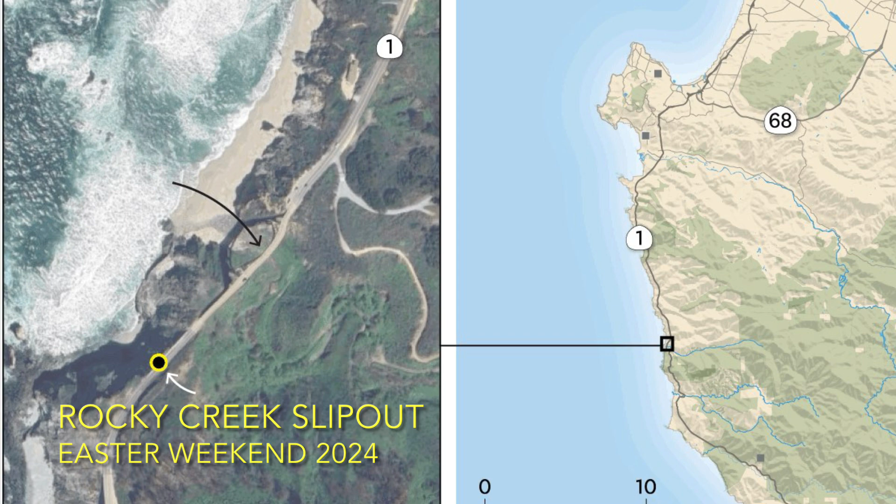Tourism and businesses - that oftentimes ends up being one of the biggest challenges. You've got a situation that can be looked at as one-way in, one-way out, depending on if there are multiple locations where we have failures we have to fix. So oftentimes it ends up being as much of a challenge as actually fixing the road or getting it back to the way it was before - more of a challenge dealing with the entities we have to deal with, in addition to actually getting the road back.

Lot going on Highway 1 normally, and even more so when we have a section of road that's caved in - whether it's more of global instability rather than local instability. There's many things that impact it.

My involvement on Highway 1 to this point in my time with CalTrans is the Rocky Creek slipout that just occurred earlier this year - the turn of late spring, although March and April often bring some of the most rain to the Central Coast, as I'm sure you're all aware.

So what I've got today is a couple things. One is I gave a presentation on this project, which is currently in active construction right now, to our branch managers meeting about 2 or 3 months ago. There's been a lot of activity and progress made in the past 2 or 3 months on this project, and what I've got in front of you is essentially a copy of that presentation.

So we'll go ahead and get right into it. Let's talk about the incident. You kind of have a visual there, second page of your handout, but you can see basically what happened was - it was the very tail end of March into April, Easter weekend or on the tail end of Easter weekend, somewhere in that time frame. We've got specifics on the next page, but we essentially lost a portion of the southbound lane, as well as a portion of an existing rock wall that we call it on that southbound lane.

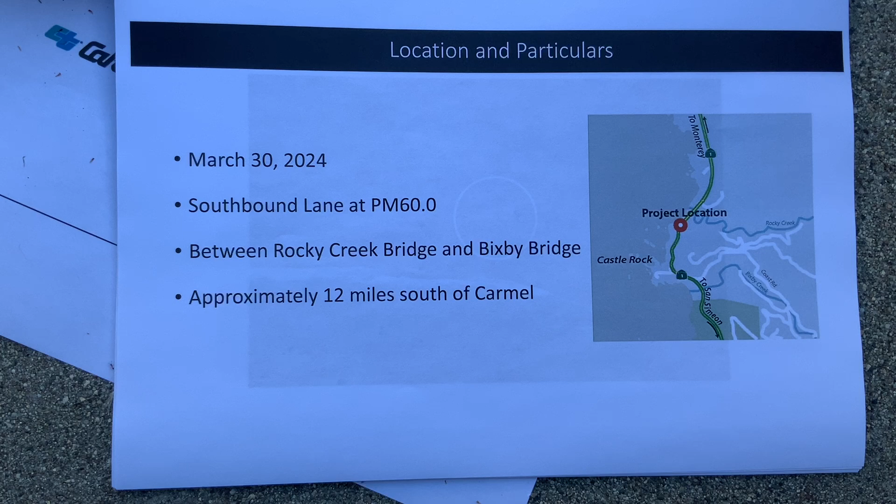Obviously, right away there was a closure of that lane. Our maintenance - I'll say for lack of a better term, emergency response personnel associated with CalTrans - responded and right away started assessing the site. I've got the date on there, March 30th, 2024, is when it happened, as far as location and particulars go.

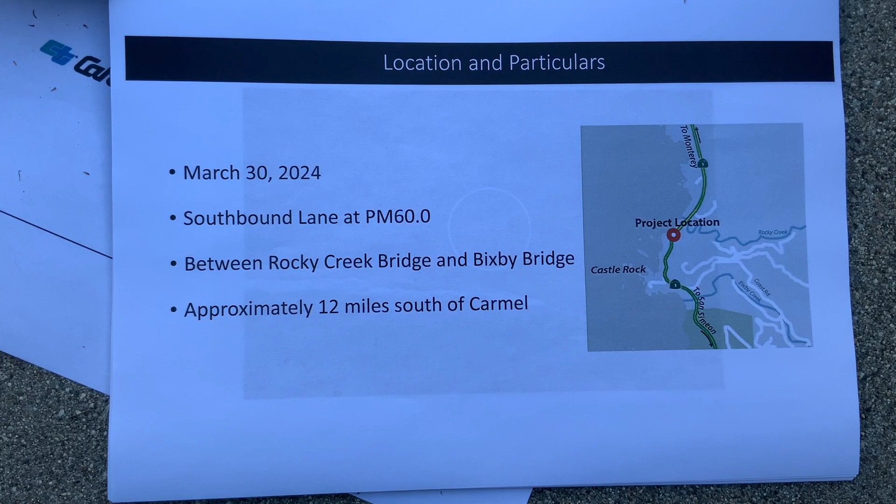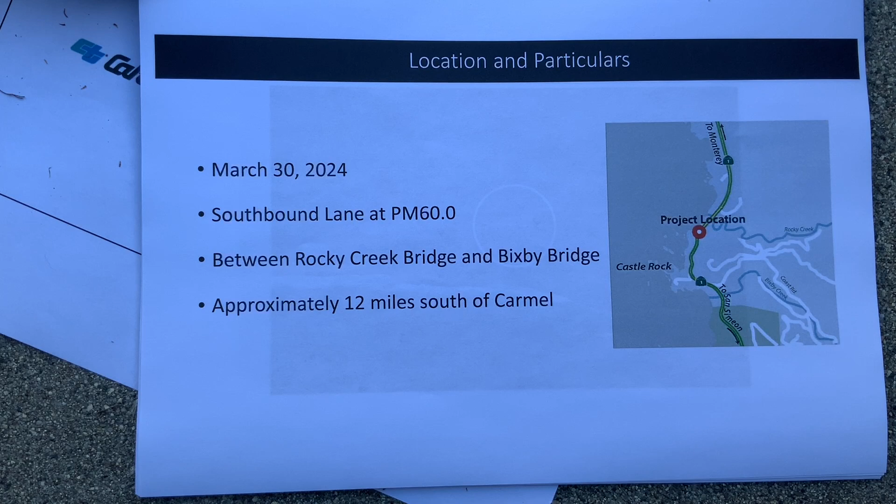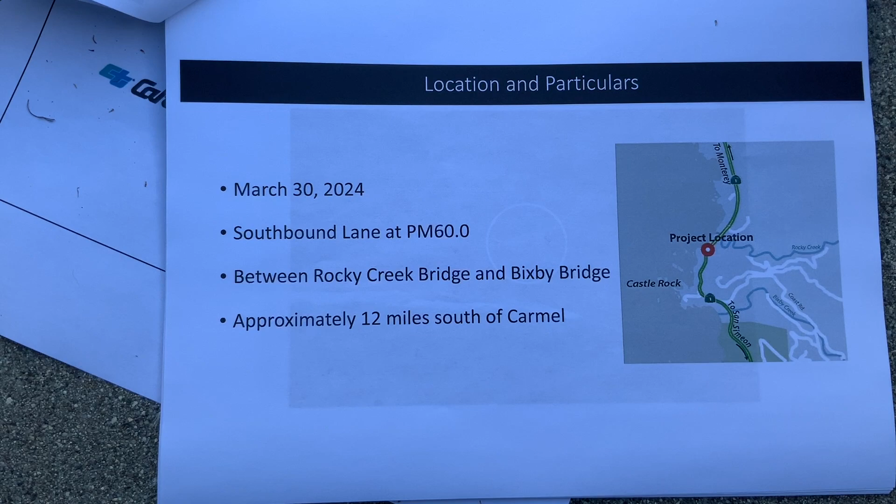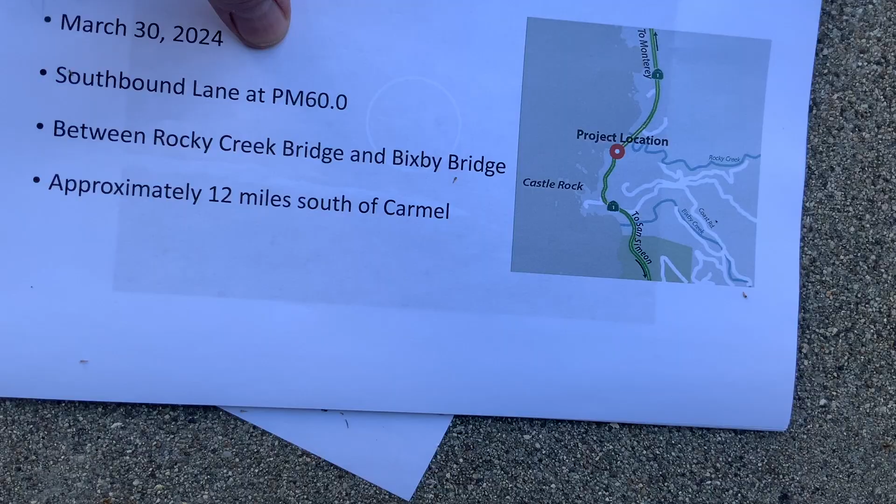Southbound lane at post mile 60, basically between the Rocky Creek Bridge and the Bixby Creek Bridge. To give you guys a representation of where the site's located, about 12 miles south of Carmel. As the crow flies, there's significant mileage you'd have to cover to get to the site. The way that myself and really anyone else can access the site these days is essentially from the north only, given that there are other sites along Highway 1 under duress right now with repair projects.

So markers from what? Where's zero? Mile zero. Yeah, I'm not sure.

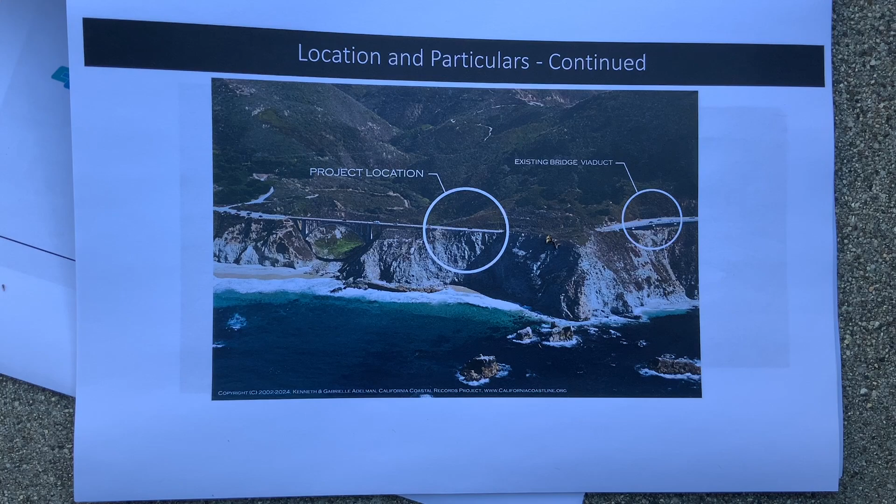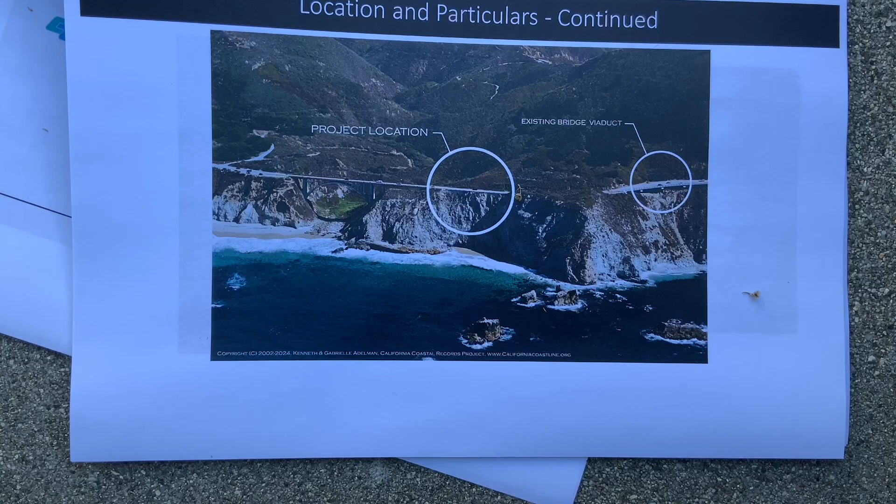I'm not exactly sure how the post mile system works on Highway 1, but if I'm looking at post mile 60, I'm assuming that would usually represent the 60 mile mark. So there's somewhere on the order of 70 to 80 miles of Big Sur coast, this Highway 1 stretch. I'm assuming those zero marks are coming from somewhere south, and being that it's only 12 miles south of Carmel, plus or minus, that's an assumption I'm going to make to transfer to you guys.

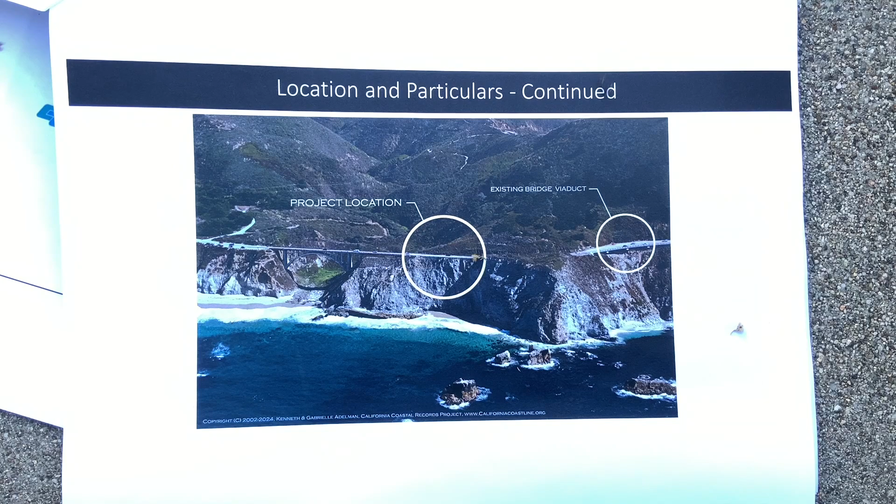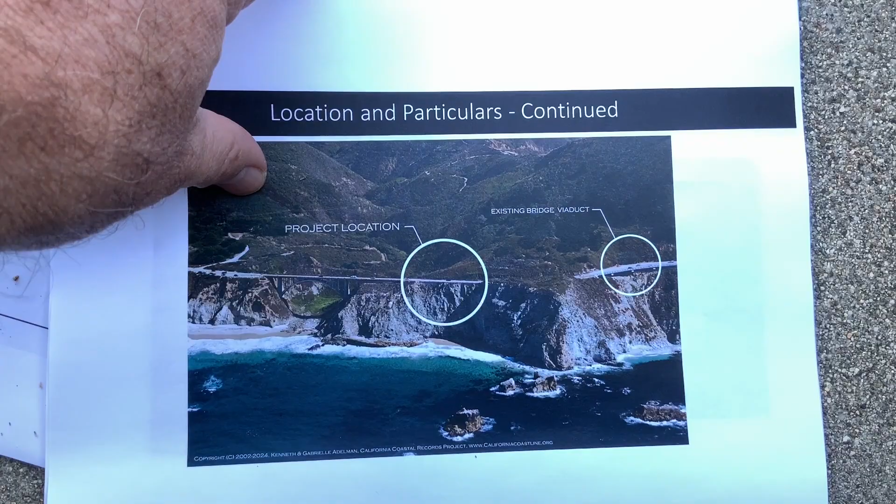Location and particulars continued. This next page gives you a representation of where this site is located in relationship to the existing Rocky Creek Bridge, and an existing viaduct, because there was a repair we had to do similar in nature to the repair we're working on now in 2011 and 2012. We've called that viaduct, now that we have this slip out site just immediately north of it, which you can see the proximity, it's literally just around the bend or a rock outcrop to the north. I think we're calling that Rocky Creek Viaduct 1 now, that's some of the terminology that's been used.

So that kind of gives you a drone footage type particulars on where we're at.

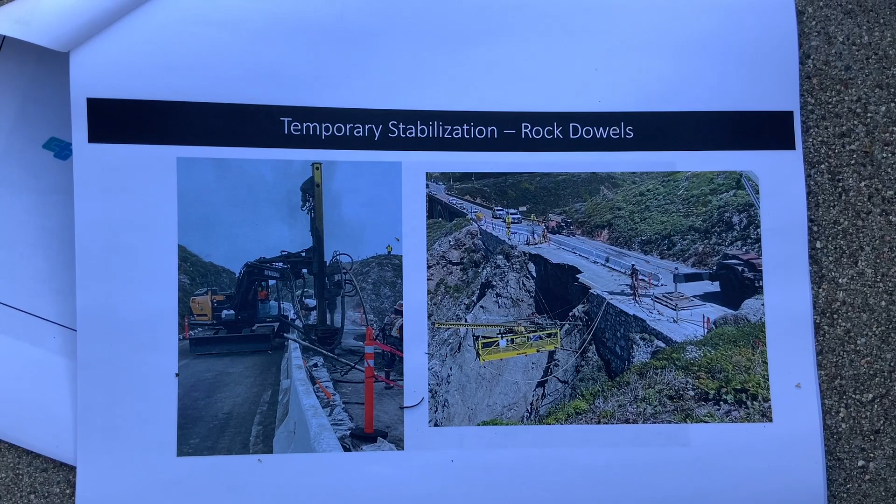So the first phase of the work was an initial response to the emergency, which included temporary stabilization with rock dowels. Essentially what took place is we installed horizontal rock dowels into the bluff and vertical rock dowels in the bluff. Once those were installed to temporarily stabilize it, we then installed a shotcrete reinforced, on the thinner side, concrete facing to hold that in place temporarily.

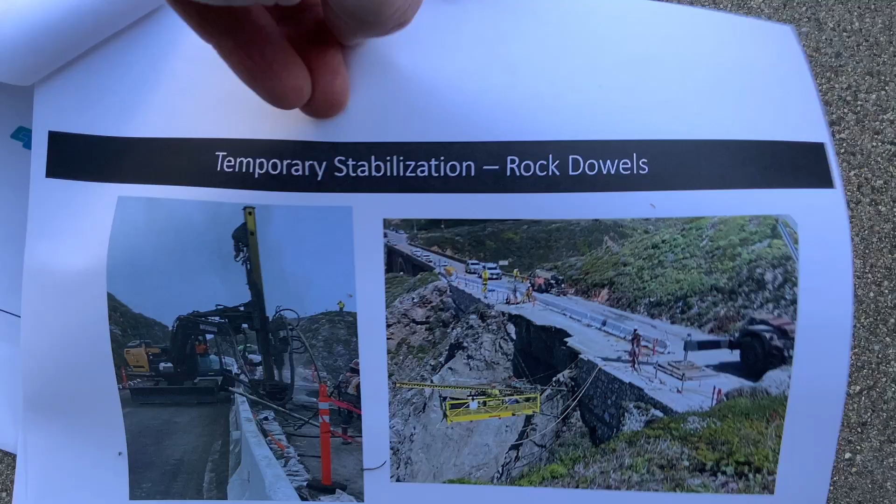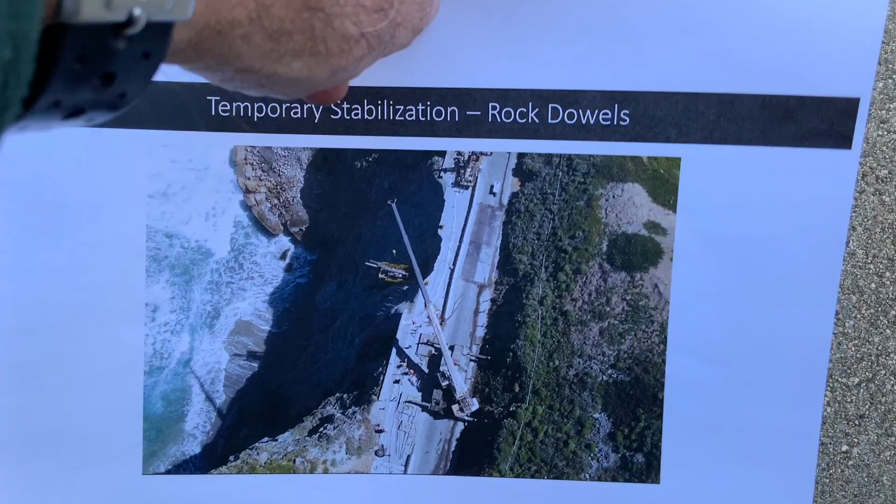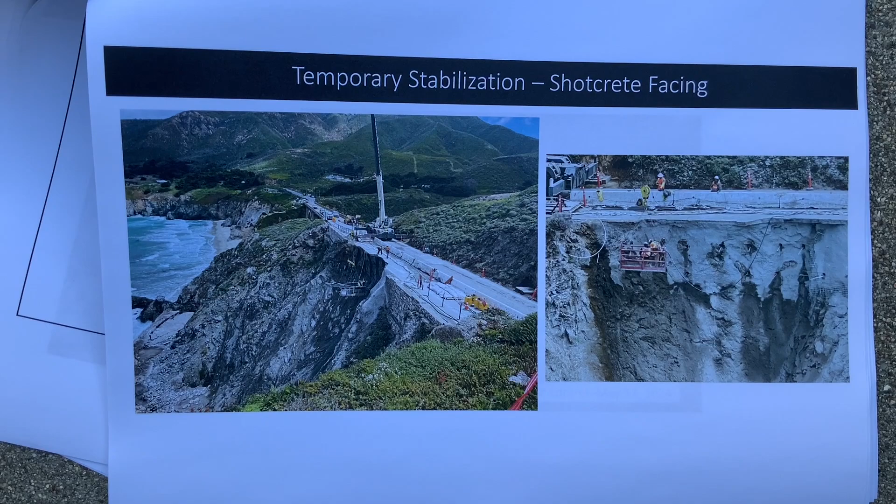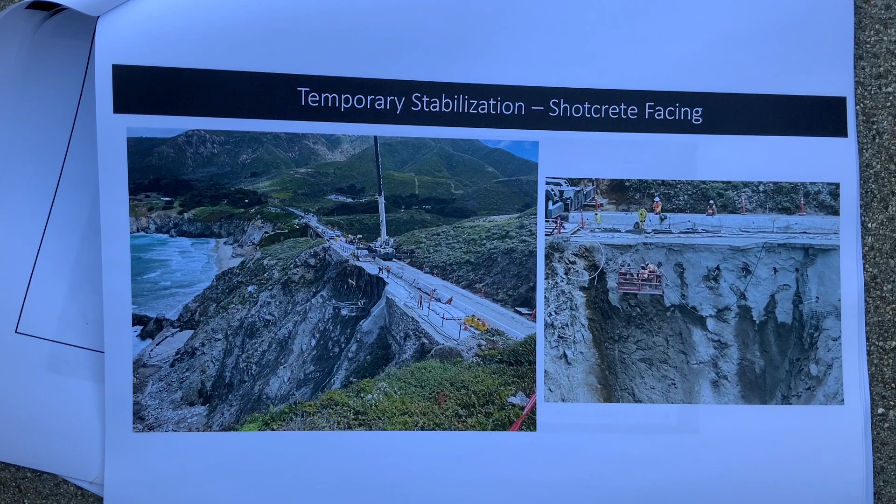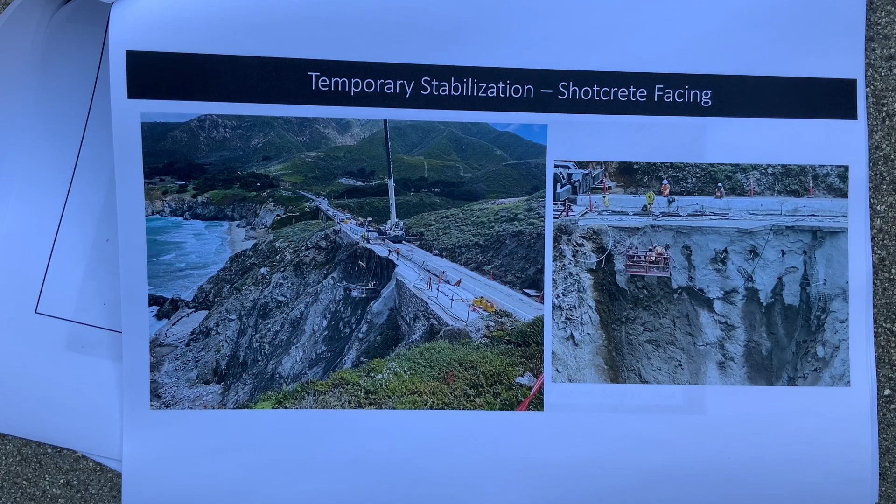Quick question about the incident in general - did the rock wall beforehand look like it had a lot of erosion, or did the cliff itself just fail because of erosion underneath that caused the collapse? The second. We had no indication that this incident was going to happen. There were no telltale signs, like longitudinal cracks in the road, of something about to happen. It's my understanding this kind of came out of nowhere. It's not the rock wall that failed that caused the slip out behind it - it's the slip out behind it that took the wall with it, essentially.

Shortly after the actual moment of the incident - I don't have a photo of it here - a section of the rock wall kind of still hung there in space, and then that shortly gave way after, which isn't much of a surprise, right? Because this existing rock wall is pretty dated, it's not new current standard type construction. So that wasn't too surprising.

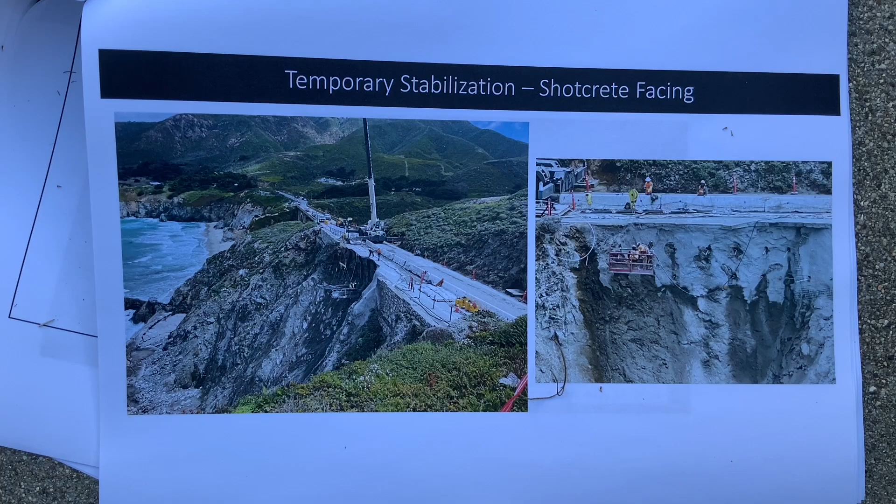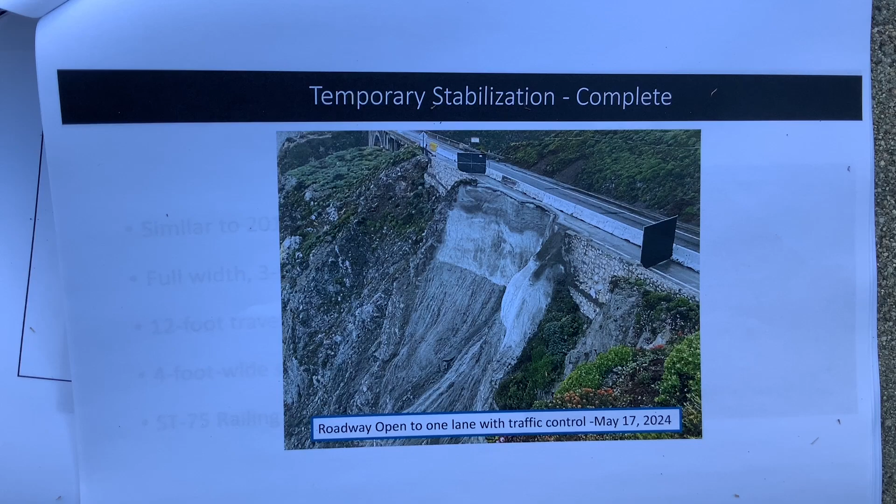This other photo shows the temporary stabilization complete, so you can see the shotcrete face. We call this temporary, but in my mind, it's beautiful temporary. I have to say they molded that shotcrete as best they could - for a temporary stabilization, I was thoroughly impressed based on my experience with projects of similar nature.

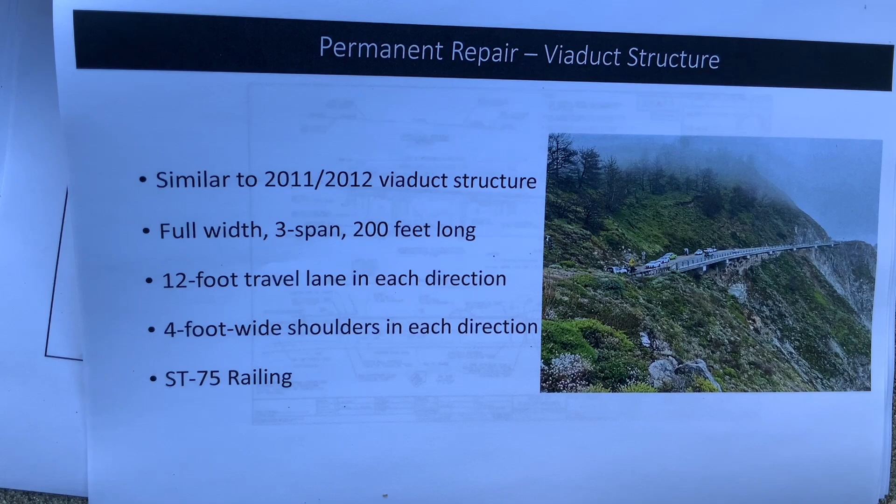But the one thing that was, in my mind, probably the most impressive, in addition to the actual coordination with residents and emergency personnel, first responders, and businesses in the area - that's a monumental thing in itself - was getting the roadway open to one-lane traffic with alternating traffic control by May 17, 2024. If you do the math on that, that's a true testament, in my mind, to how quickly Caltrans can respond in the event of an emergency like this. You're looking at essentially 6 weeks - we went from the initial photograph you saw to what you see here on this sheet.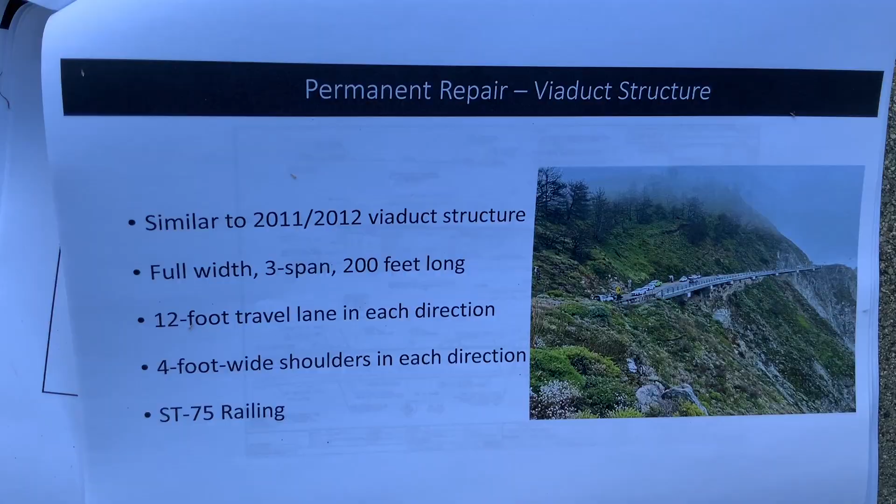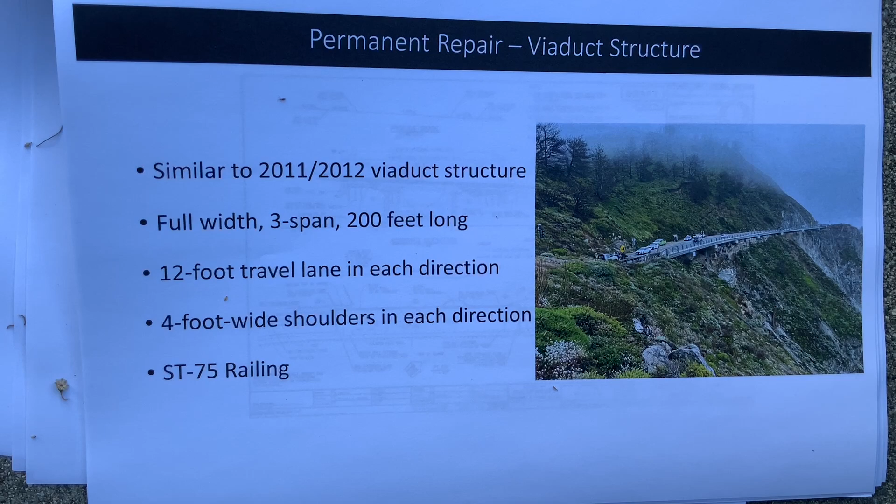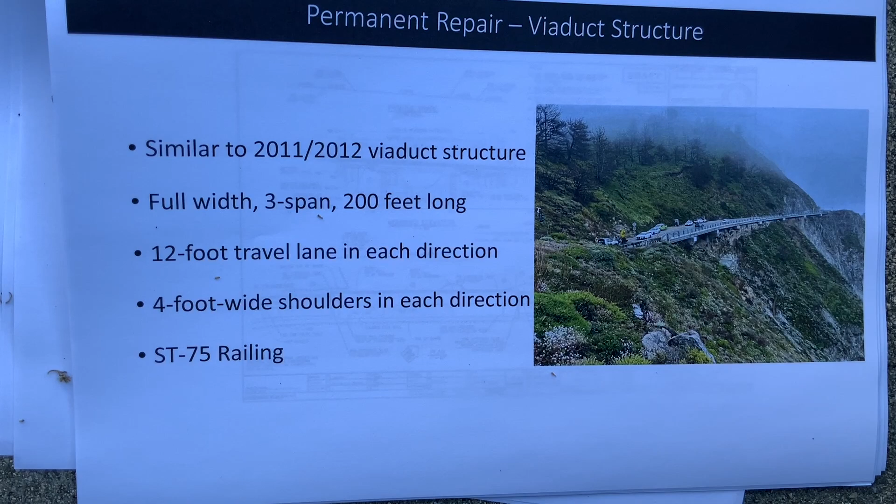Next we'll get into - while this was going on, I was not actually physically involved in the temporary stabilization operation, I was not managing that effort. But I was brought on within days to a week, maybe a week and a half, and was asked to manage the effort to get a lane back in each direction, as well as facilitate that we were currently working under a temporary stabilization and needed to get a permanent repair in place. So that's where we go into the permanent repair of the viaduct structure, very similar to the 2011-2012 site I mentioned just south of there.

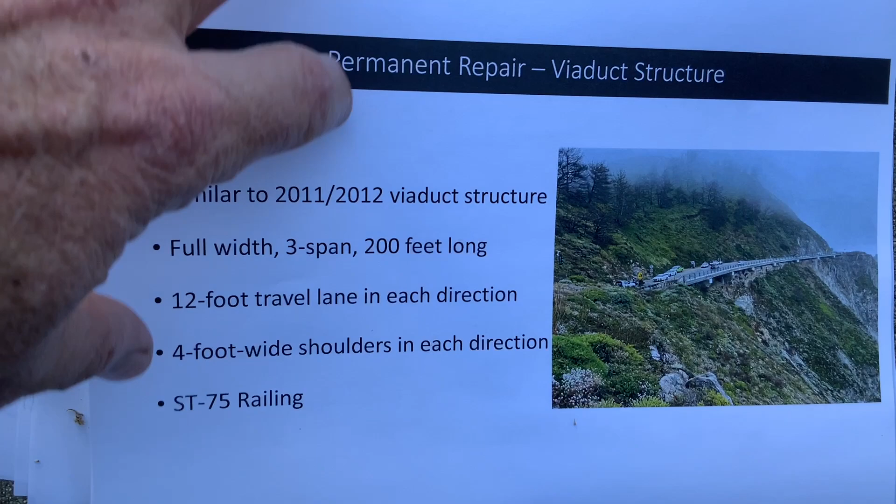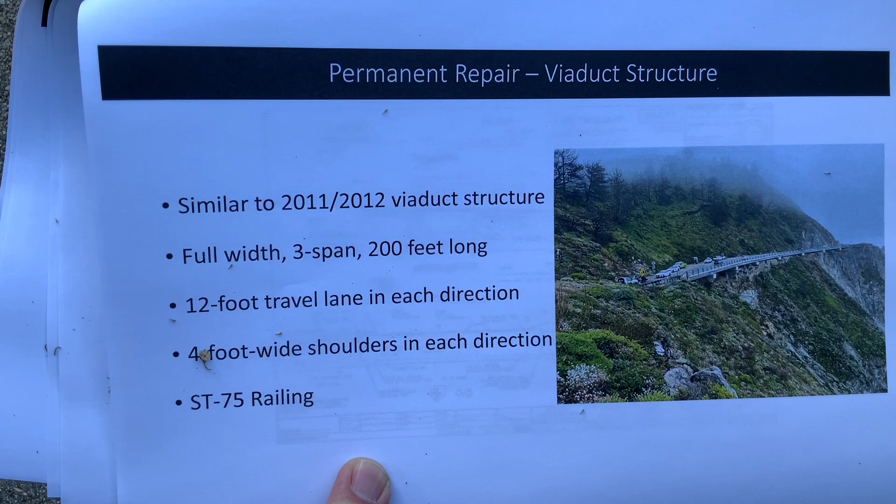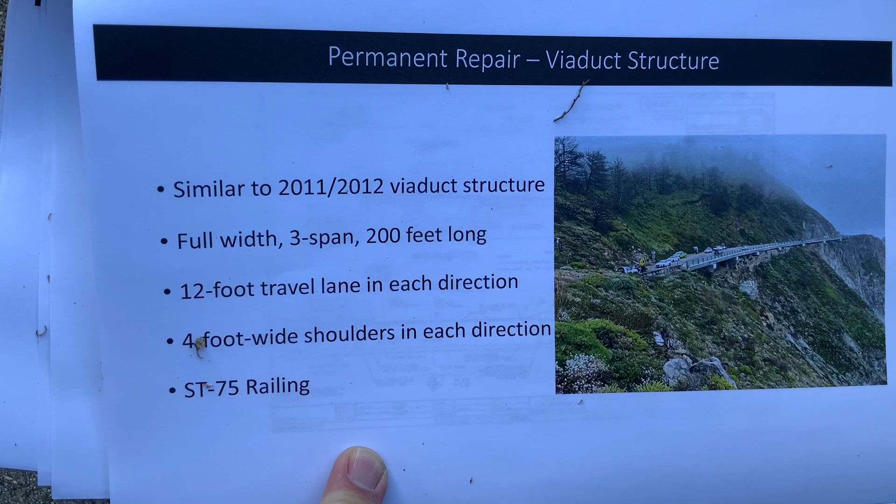Our viaduct structure that we are now building is a full width, 3-span, 200-foot long structure. The end result is going to be a 12-foot travel lane in each direction, with 4-foot wide shoulders in each direction, and ST75 CalTrans standard railing, similar to the railing in the 2011-2012 repair, although enhanced. By enhanced, I mean staining of the metal elements, and integral color in all the concrete elements for that railing.

Did you need a copy, or you're good? Okay, cool, because I've got extras. I was worried I was going to be short, so I'm happy about that.

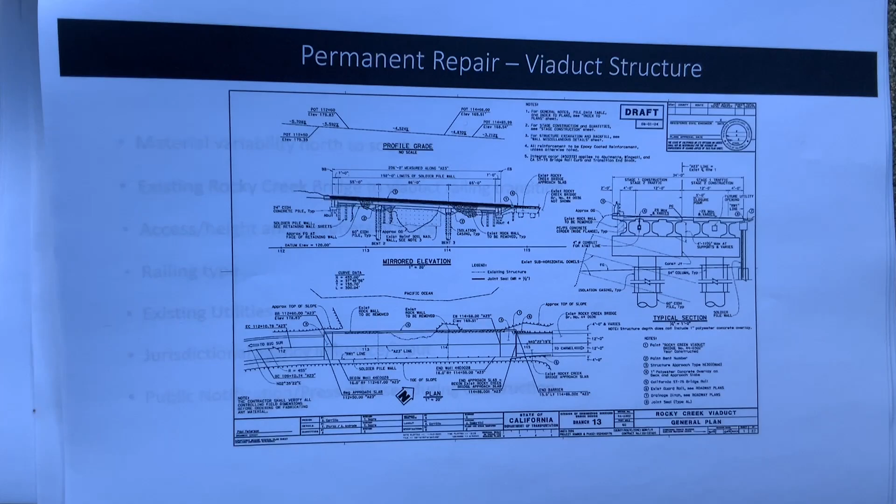Continuing to talk about the permanent repair, the viaduct structure that we're building. This was draft at the time, but we've progressed a lot. You can see the date of August 1st, 2024 in the upper right-hand corner. This is one plan sheet, the general plan sheet out of the plan set, used to bring a contractor on board and build this.

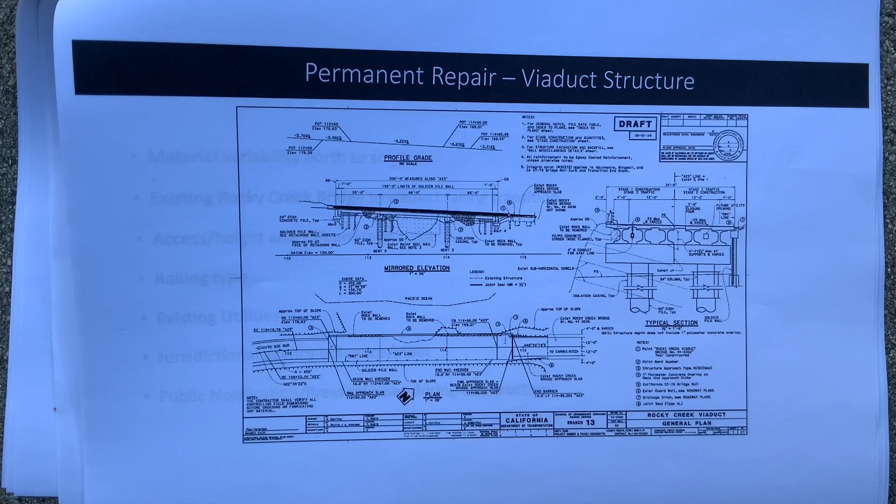You can see that in the mirrored elevation view. I realize it's kind of small on 8.5 by 11, but it's a 3-span structure. You have an abutment on either end and 2 bents right in between, which makes up your 3 spans between the bents and abutments.

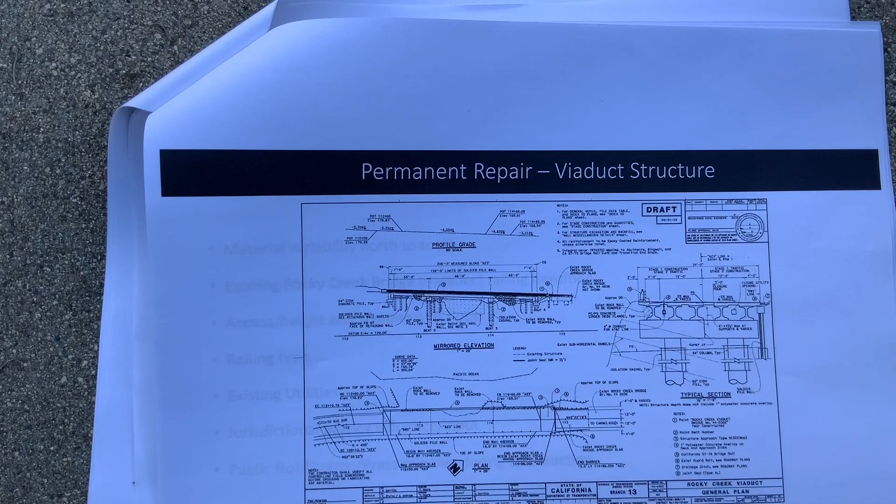The way we're building this, if you look at the typical section on the right, is a 2-stage construction. We're currently building stage 1, which will essentially become the southbound lane. Once that's complete, we'll flip over and build the northbound side of this viaduct.

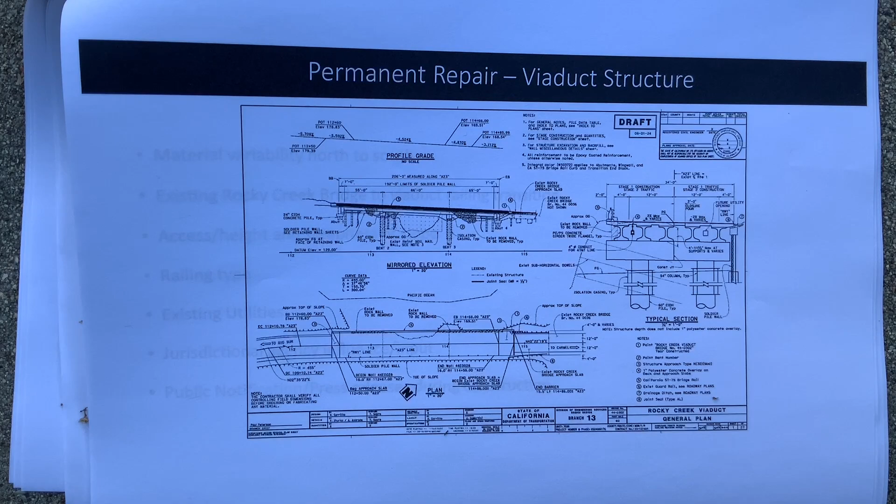At each bent location, intermediate to the abutments, there are 2 deep foundations, what we're calling cast-in-drilled hole shafts. Essentially they drill a hole of a specified diameter to a certain depth, lower a steel reinforcement cage down, and place concrete, usually from the bottom up, to provide foundation for this new structure.

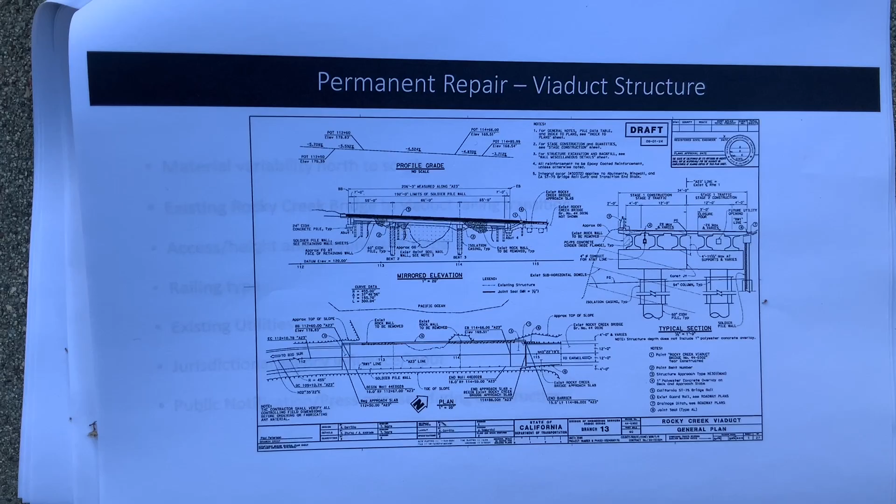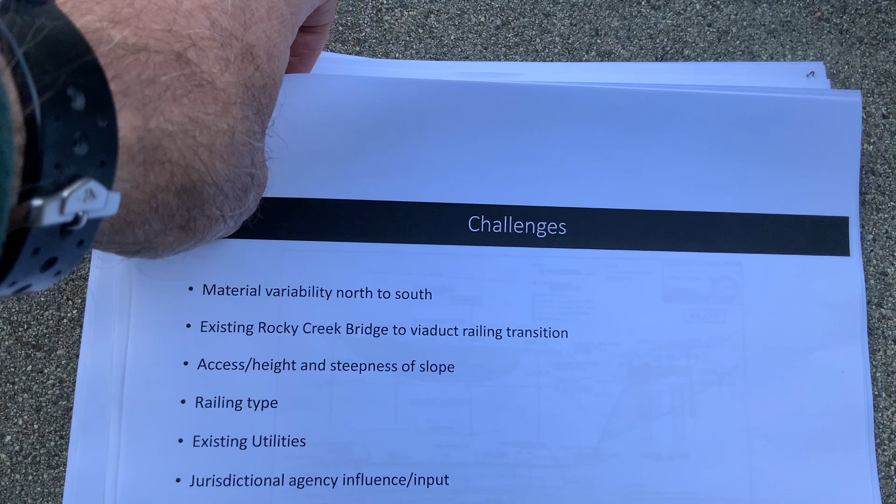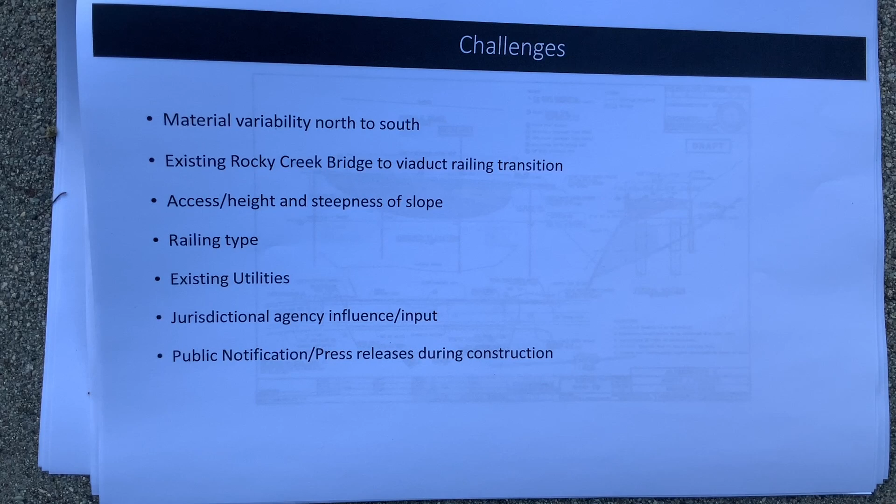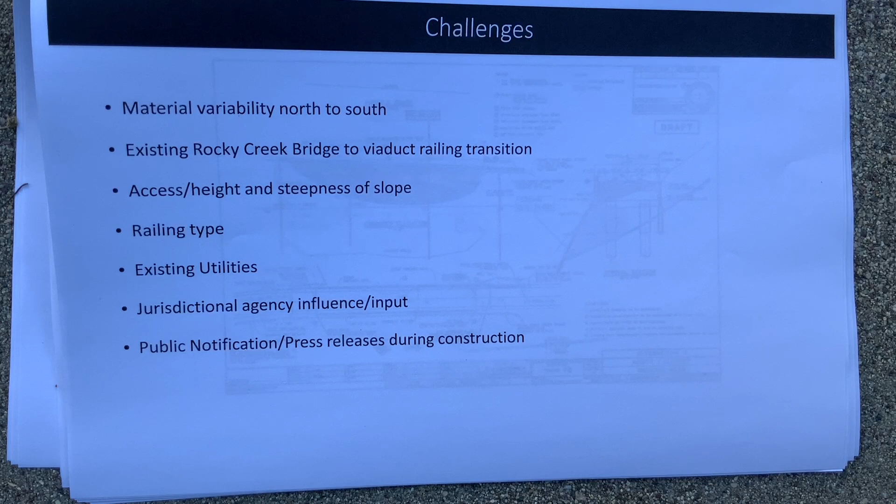Talking about challenges, some of these were more of a challenge than others. Often in our projects we have to deal with just about everything based on the size and scale of our projects, the location of the projects, typically environmental constraints, permitting from regulatory agencies, and right-of-way impacts. If we have to encroach into somebody else's right of way, those typically impact our projects most significantly from a time-of-completion standpoint.

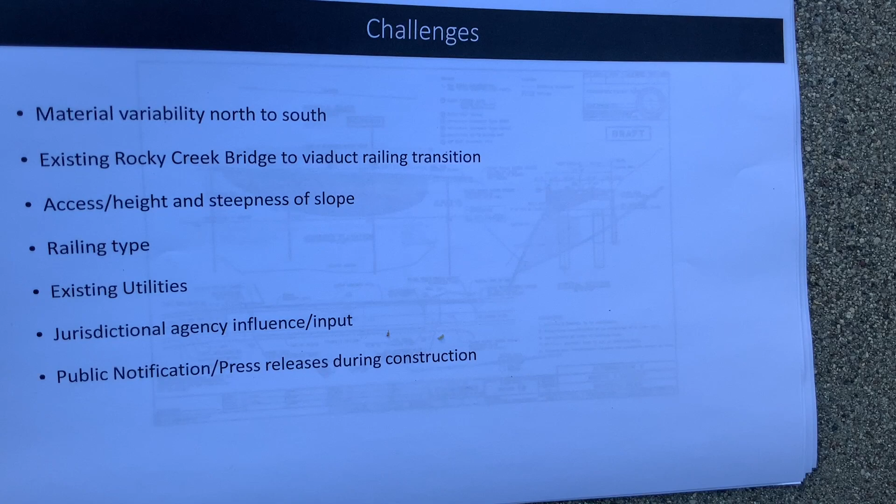Some of those are listed on this list, but for this project I'll go through them. Material variability north to south, existing Rocky Creek Bridge to viaduct railing transition. We're right up against an existing bridge, so we had to figure out, by the time we get complete with this project, it's going to be right up against an existing bridge. So how do we mesh those two?

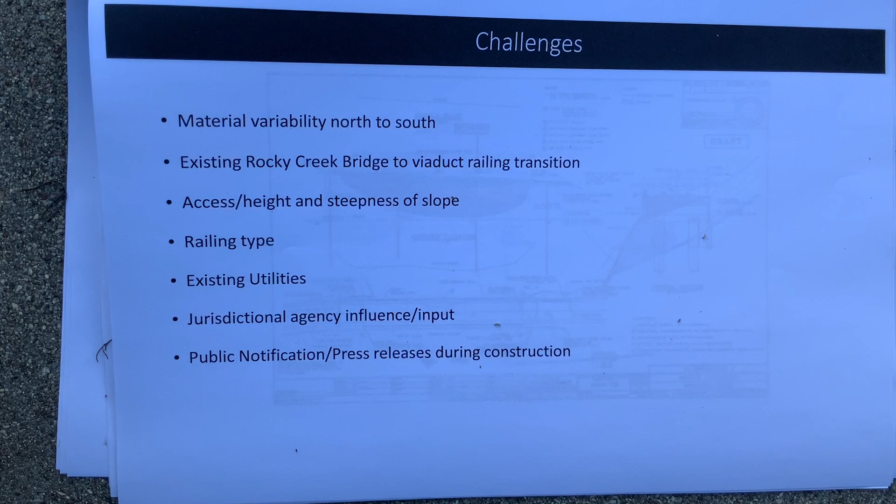Obviously, access and the height and steepness of slope. That bluff is around 170 to 180 feet tall at that location, and the relief isn't gradual down to the beach - it's literally beach and straight up. So that presents challenges from a constructability standpoint in providing access. That was one of the challenges.

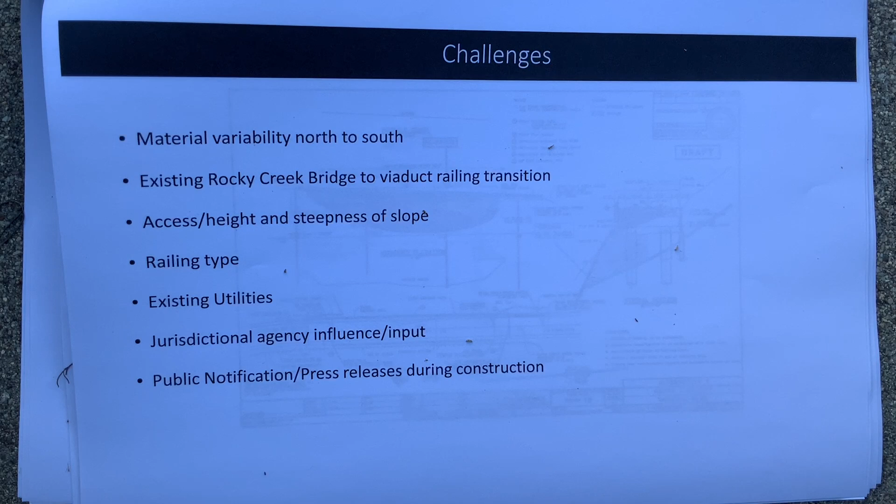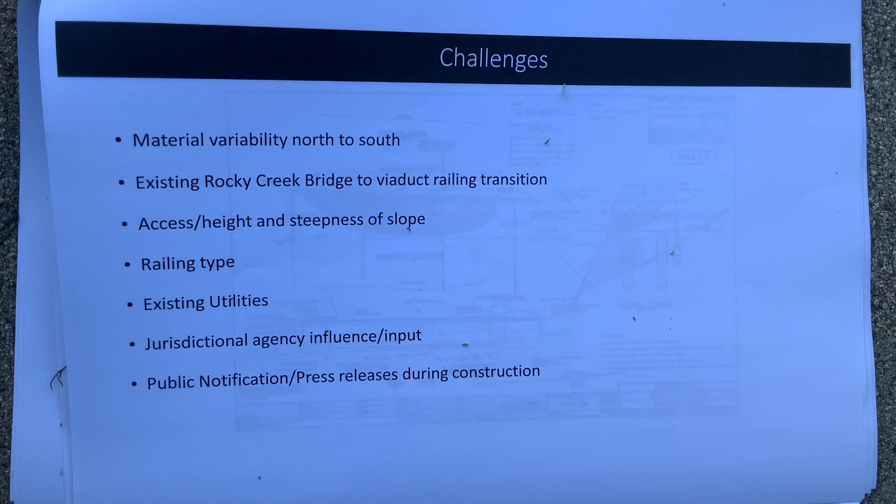I say railing type - I'd said the project is going to include an ST75 standard railing. There's been a lot of discussion, and I'll try to keep it simple. A lot of discussion, a lot of input. Have had to deal with the public and Coastal Commission with regards to railing, and some of that conversation still continues to linger.

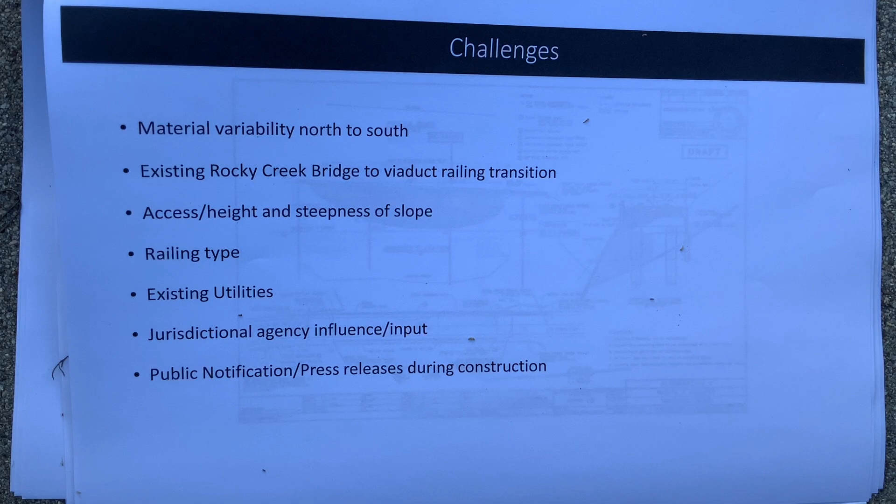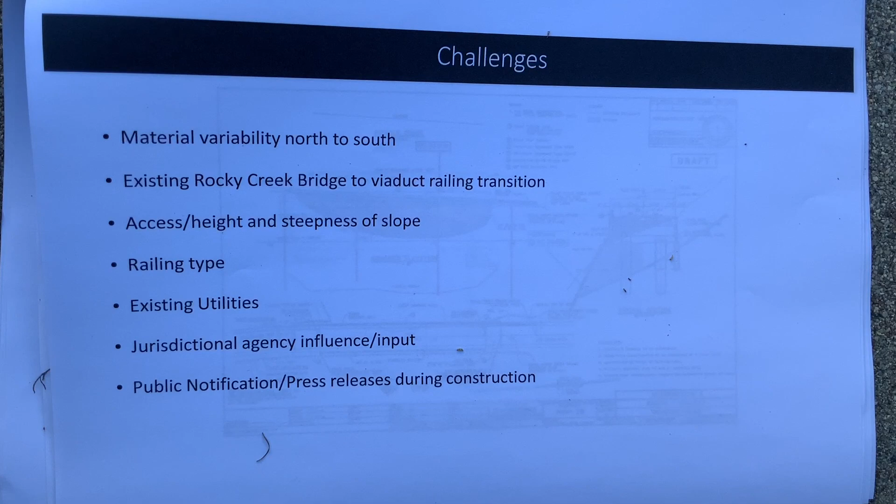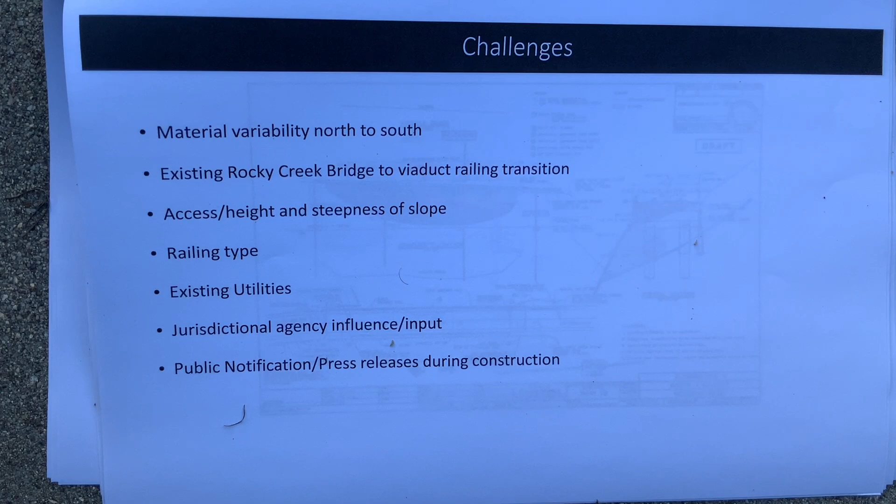They want more transparency through the railing? Well, yeah, I mean, just to summarize, transparency is desired, because you want to have the same view that you did before. Yet you have to mesh that with current safety standards handed down by CalTrans, based on numerous things. But then there's also, okay, we want it transparent, but you also want it to look a certain way. So that's where you start getting into color, stains, texture, and where you stop certain things. So to answer your question, transparency is huge in the eyes of Coastal Commission, from what I've gathered - protecting that visual openness to the ocean for the motorist and whoever else is using it. Because remember, we have a significant bicycle contingency all along the coast, so that's something else that had to be taken into mind.

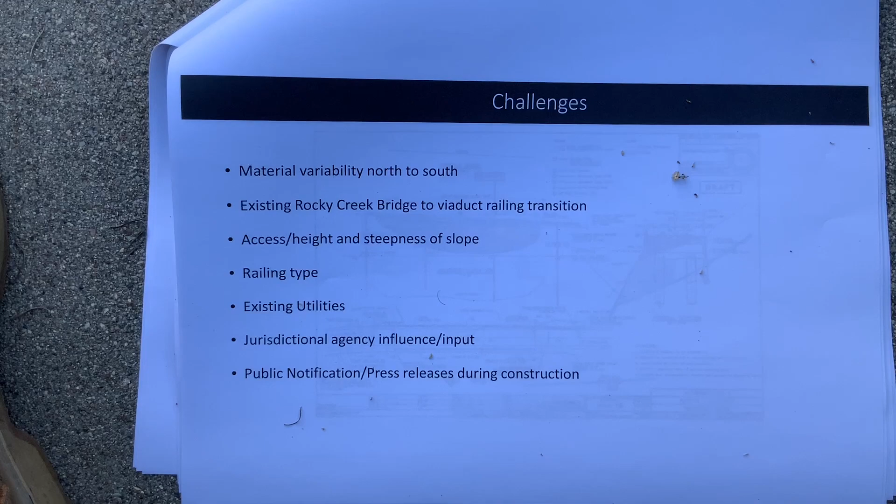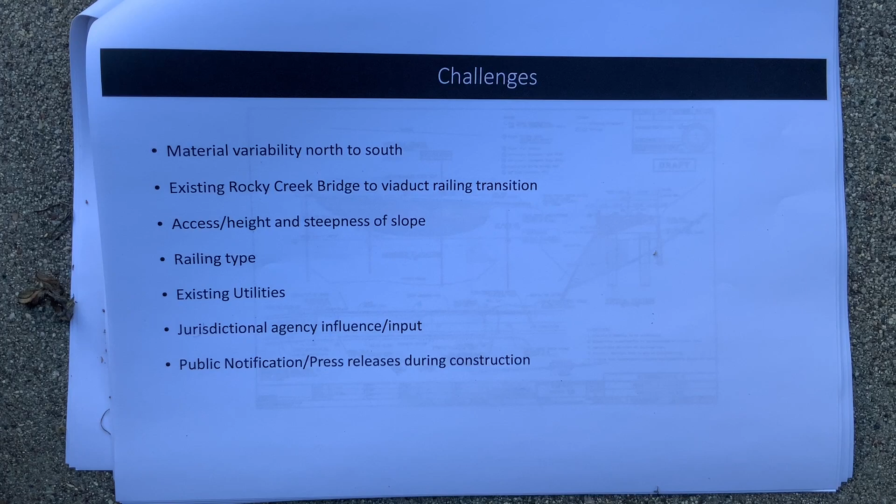I will say, before this incident happened, the existing configuration of the roadway from a geometric standpoint had little to no shoulder - anywhere from 0 to 2 feet through the whole site, with a bit more coming north or south of it. But with this project, it's going to end up with a 4-foot-ish shoulder.

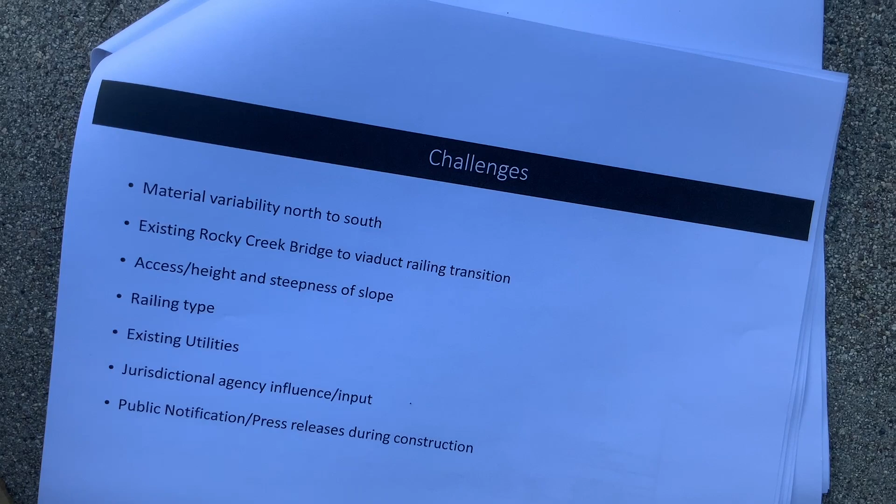So, you know, you're talking about a huge margin of improvement there with regards to accessibility.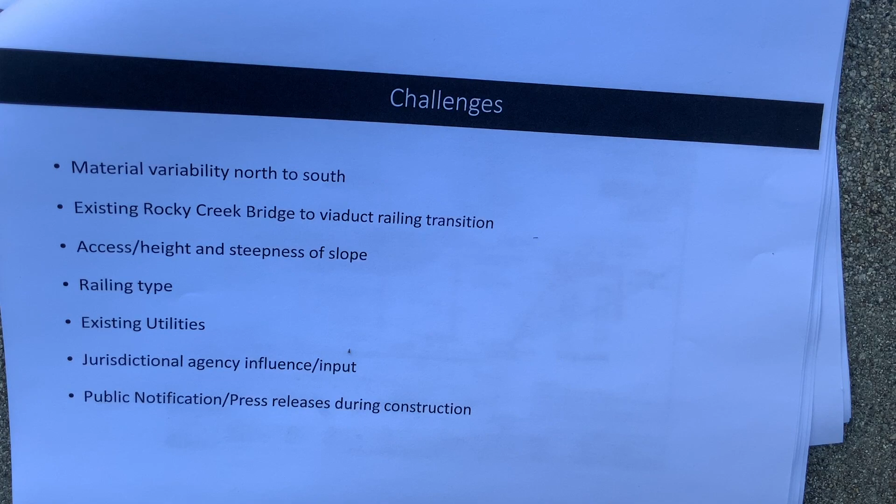Question? I was curious because I go to Carmel. I've been noticing for the last, I think at least since I've been going here around January, February of last year, there were large flatbed trucks with car-sized boulders on them going to and from, slow all the way up. Is that for the shoulder, or is that...

Not for this project, yeah, but that is probably, and I have heard about what you're talking about - Volkswagen sized boulders, that kind of thing. We've got multiple sites along Highway 1. One of which the repair I think was just completed. The other one is ongoing, and had some particular other things come up with it. So one or more of those sites is likely where those boulders were being taken.

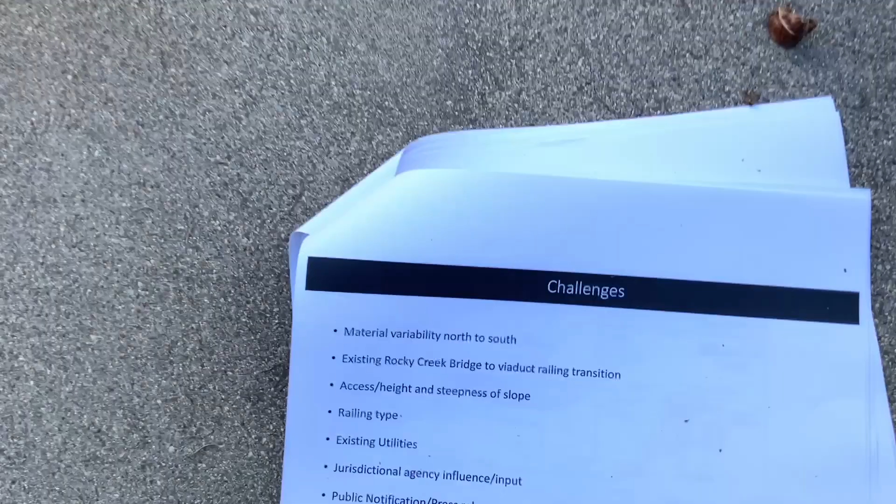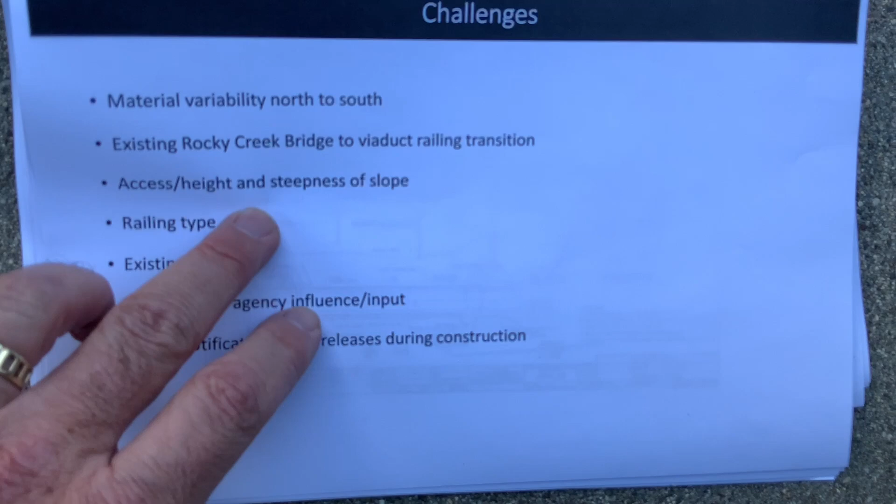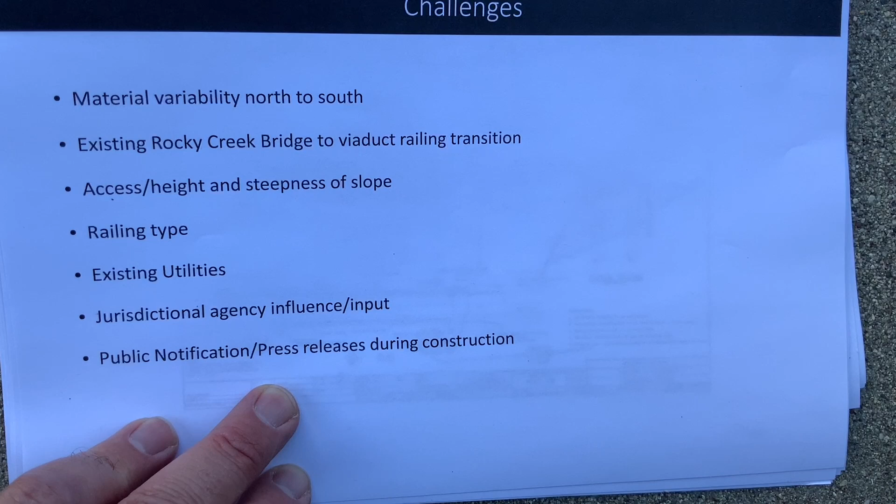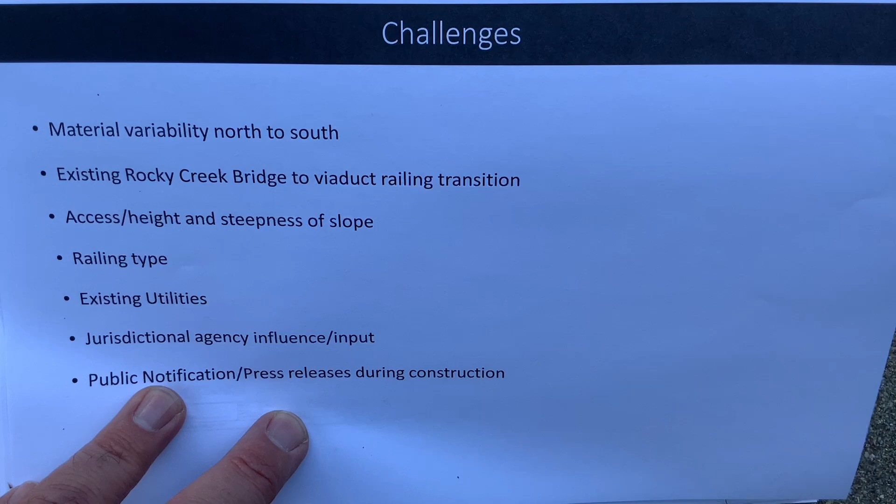So, continuing to talk about challenges - existing utilities. Actually I have this on the list, but it was probably one of the least impactful issues with this project. From what I understand, single AT&T line going through the site, maybe a couple others, but no impact - or impact to AT&T, but it actually ended up being one of the least impactful challenges on this entire list that we had to deal with. We've rounded the corner on that quite a while ago. So there is relocation work that needs to be done associated with it, but it was very expeditious, relatively speaking, to get our arms around that.

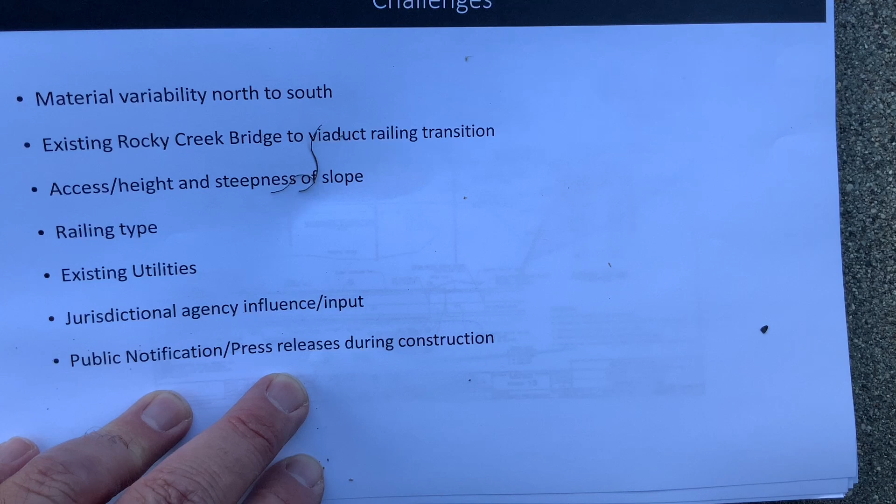So jurisdictional agency influence and input has and kind of continues to be a factor in the project, but we are continuing to make progress.

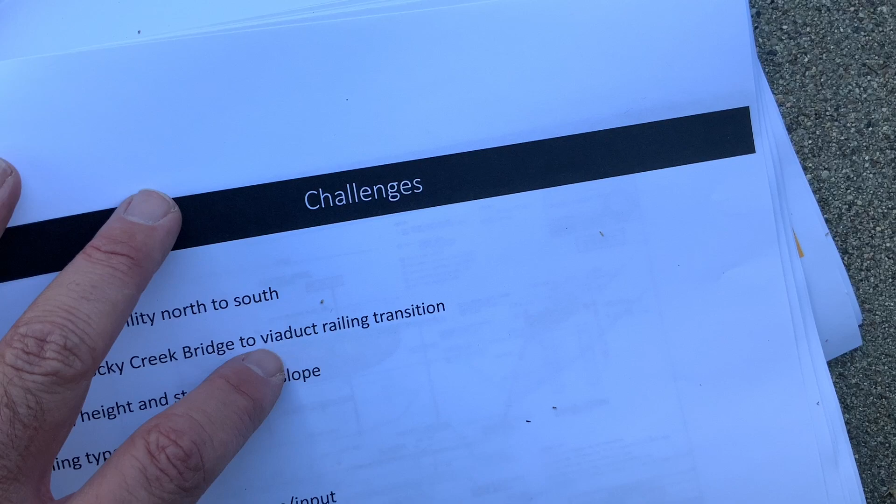Public notification and press releases, PIO, right? Our public information officers, nonstop, doing what they do best. We've got a really good team of individuals that handle that.

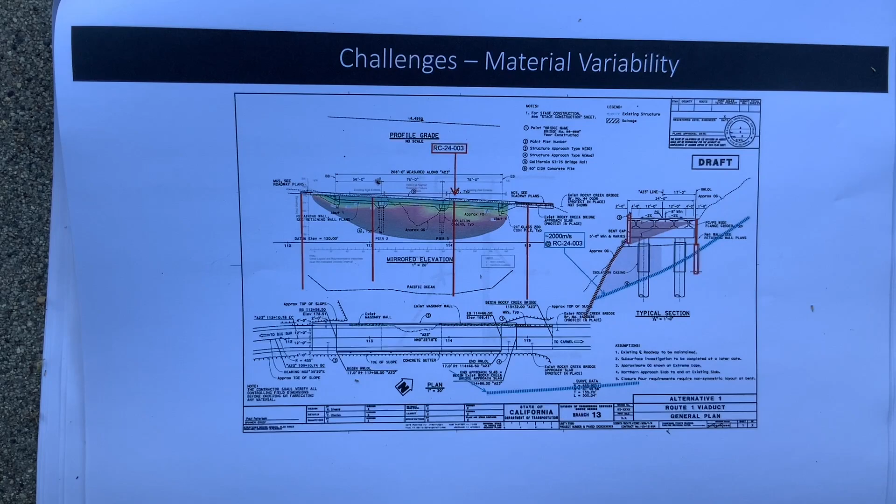There was a huge effort when the incident first took place, right? True urgency there - incident happened. Okay, now we have to have the conversations that we normally have in a planning atmosphere, like real time. How are we going to handle it now, and over the next few weeks? Then that transitioned into, okay, we're going to develop what we're going to build to permanently repair this.

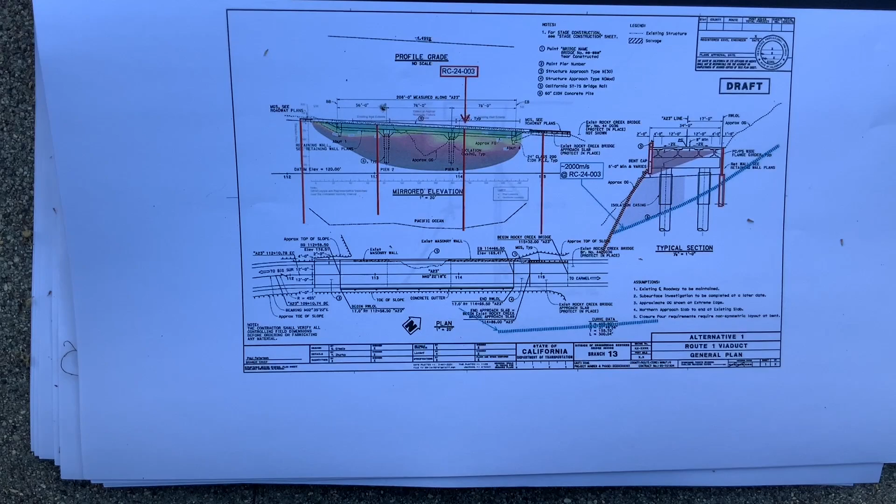And then we had time to think about how we're going to handle it from a notification purpose. A lot of that ties into the stage 1 and stage 2 construction, which essentially enabled us to have one lane of traffic with some sort of traffic control in place throughout the course of construction over the past few months.

But that's always a challenge, right? Because things come up. You get certain events in the area that certain people want accommodations for, so it's kind of an ongoing thing as we go through construction.

Go ahead. I was wondering, during the initial construction, how did you guys route traffic? You're talking about during the initial temporary stabilization? One lane of traffic with alternating traffic control. So very initially, it was traffic control personnel out there, manual - boots on the ground folks with paddle boards, cone off the site, and then it's communication, usually via walkie-talkie between the two on either end. Stop traffic, flag through, alternating. Now you can go northbound, southbound.

When it initially, immediately happened, there was an immediate initial closure. That was minimized to the best extent possible - I can't remember, but we're talking in terms of hours rather than days. So it went from hours to days to hours of having an immediate road closure, to then one lane alternating traffic control manual, then to automatic one lane alternating traffic control - that's where we set up temporary signals. And that lasted through the temporary stabilization, then that essentially went right into the permanent construction.

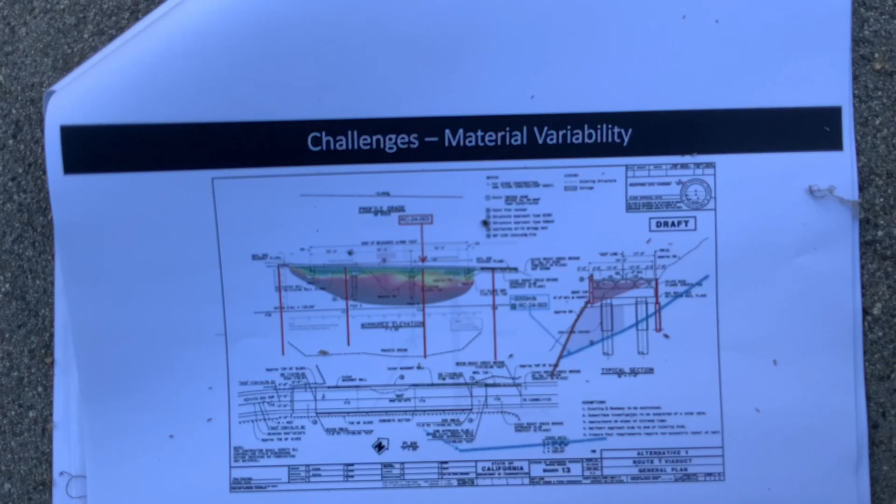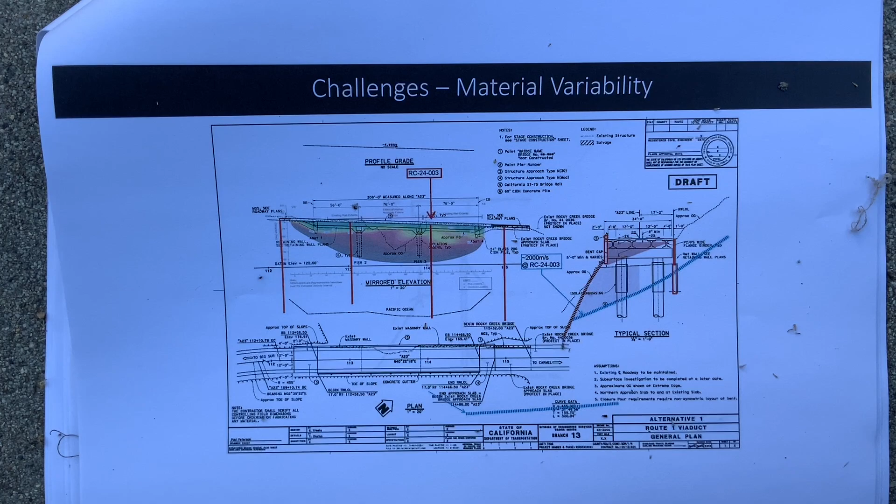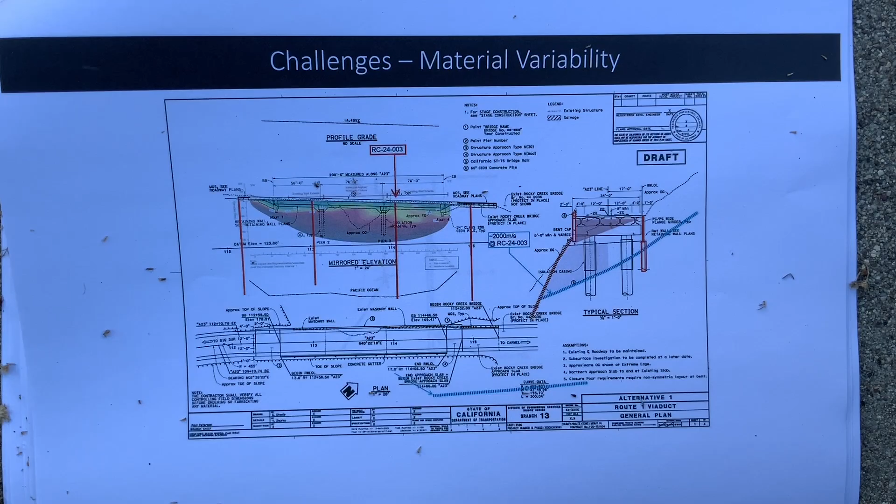I was kind of wondering because I saw there was a big crane and it looked like it was taking the whole road. Yeah, so throughout the course of permanent construction, on an intermittent nature based on the size of the equipment, you're correct - there's got to be a full closure for 2 hours on a given day. That's where our PIO people come in. They have to figure out a way to communicate that - hey, this is what we think it's going to take, be prepared for this. How much notification do these first responders require? But you're exactly right, there have been times where the road is completely closed, but that's communicated in advance and everybody's prepared for it.

Is there an alternative route near the area, or is it? Well, no, usually not.